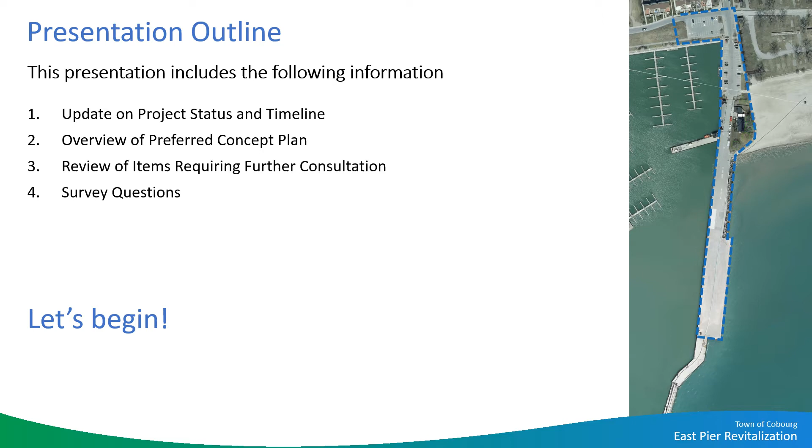The town and design team have been busy since the last project update was provided in September of 2020. Branch Architecture, retained in July 2020, has finalized their cultural heritage report pertaining to the East Pier context and the lighthouse. The findings of this report have been integrated into the developing design for the pier.

As noted, the town, in collaboration with the MBTW Group, conducted a virtual public meeting followed by an online survey and discussion forum, which was open from September 4th to October 5th of 2020. Results from this public engagement can be found at engagecobourg.ca/waterfront-plan-east-pier 1.

While the design work for the East Pier revitalization area was underway, the town retained Shoreplan Engineering to assess the condition of the existing harbor structures. Shoreplan's final report indicated that several of the shoreline structures in the harbor area require repair before any other improvements can be implemented. This is a new situation that has affected the project timelines and will be further explained in the next couple of slides.

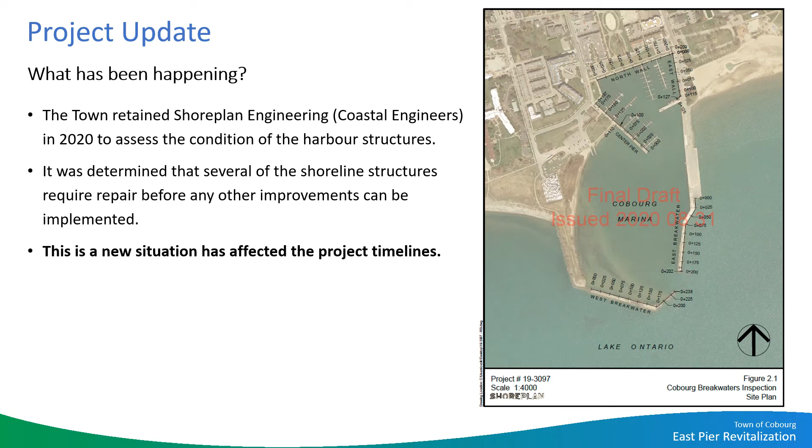The existing harbor structures affected include the east and west breakwaters, east and north basin walls, and the center pier. The town has retained a consultant to prepare detailed design drawings for the shoreline repair work, and this work will begin shortly.

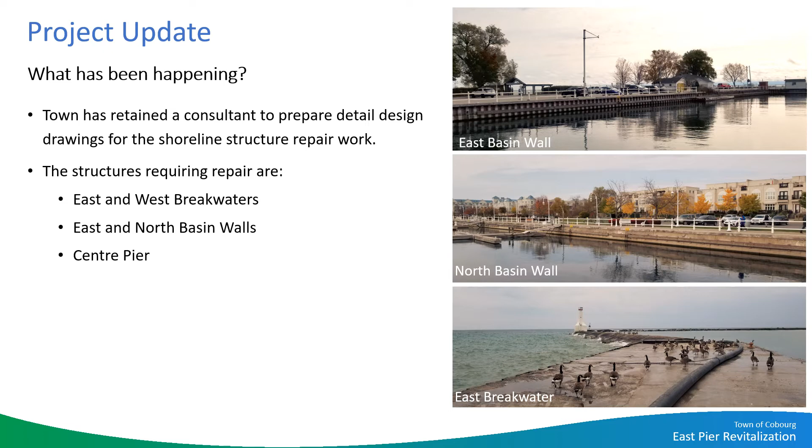In the meantime, the design team is moving forward with a detailed design for the East Pier revitalization area. Please note that the limit of work includes the pier area from the Coast Guard building south to the end of the pier. It does not include any portion of the parking lot to the north or any part of the east breakwater. Landscape improvements to the East Pier revitalization area cannot be done until the recommended shoreline repairs have been completed for the east breakwater and the east basin wall.

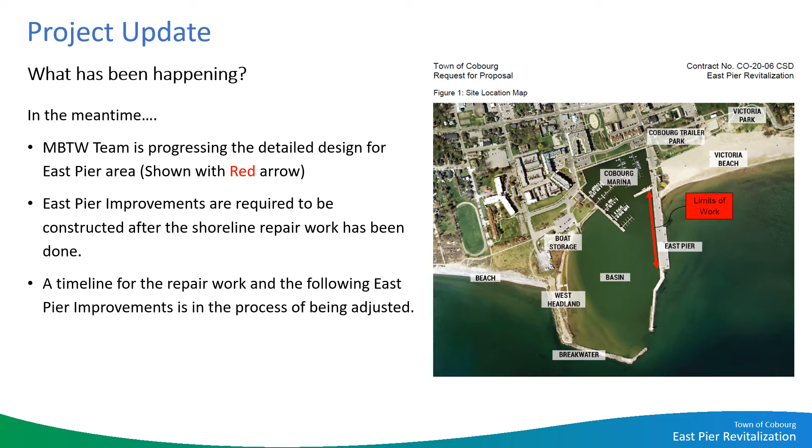The town is working on the timeline for the harbor structure shoreline repair work and the East Pier revitalization improvements. The revised project timeline presented here is preliminary and will be adjusted once the town's shoreline repair consultant begins their work. It is anticipated that the detailed design for both the East Pier revitalization project and the harbor structure repairs will proceed at the same time, with the East Pier detailed design work wrapping up this summer.

It is expected that the on-site harbor structure repairs will begin in early 2022 and conclude sometime in 2023. Once the harbor structure repairs are complete, construction of the East Pier revitalization work can begin, subject to council approval. It is anticipated that the East Pier revitalization works will take between 8 to 10 months to complete.

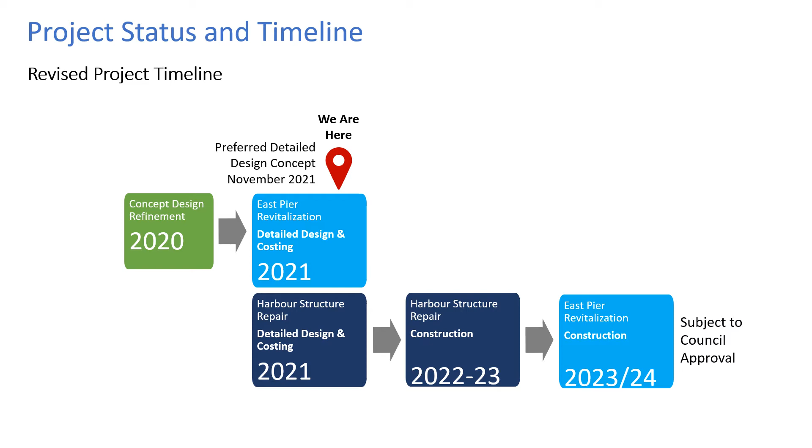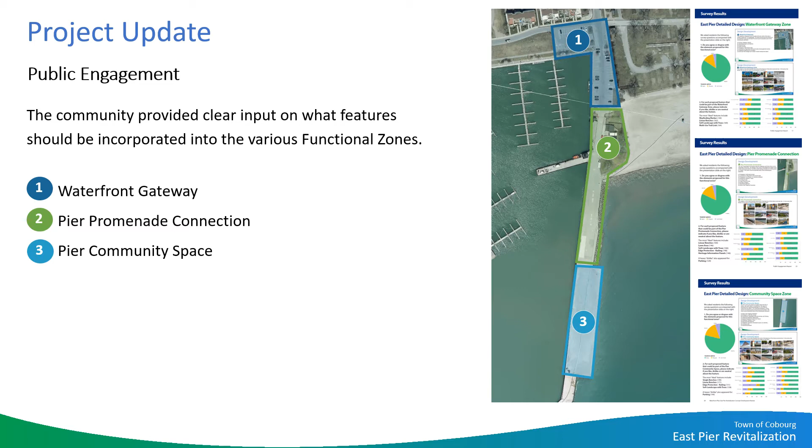The next few slides provide a quick snapshot of what the town and design team learned from the September-October 2020 public engagement. The community provided clear feedback on what features would be preferred for each of the project's functional zones. We also learned that the community preferred both the venue and urban park and expanding the green option design approach for the site. The design team has incorporated key elements from both design approaches into the preferred concept.

This will include incorporating features that will facilitate a variety of special events, while at the same time providing space for soft landscaping and trees. The community also indicated that a hybrid between heritage and contemporary site elements would be preferred, and that cultural heritage interpretation opportunities would be important.

The next few slides include information on the preferred concept plan design. We will quickly point out some of the main features of the design. Please feel free to pause the presentation at any time to review the plan in more detail. Note the thought bubble symbol in the lower left corner of the slide, which means we'll be asking you a question regarding this information.

Item 1 is a 6-meter wide access road that runs along the west edge of the pier. Note that north on this diagram is pointing to the right. The access drive accommodates vehicular circulation to the end of the pier and connects to a full turnaround area. Pedestrians and cyclists may also use the access drive for circulation.

Item 2 identifies 2 locations along the access drive where traffic calming measures are proposed. These bump outs include bollards, seating opportunities, and crosswalk connections to the other side of the pier.

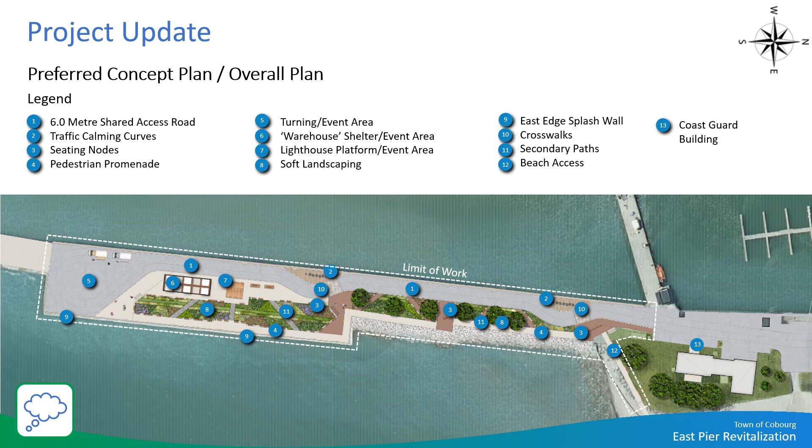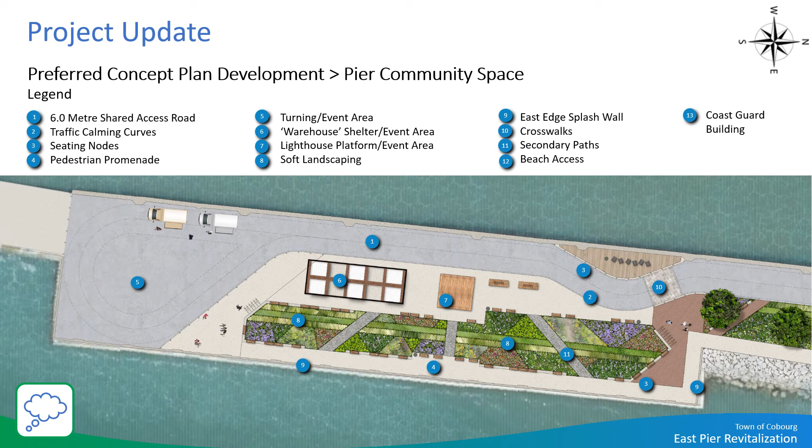This slide shows the south part of the pier as an enlargement so you can see more detail. Again, please feel free to pause the presentation to take a closer look.

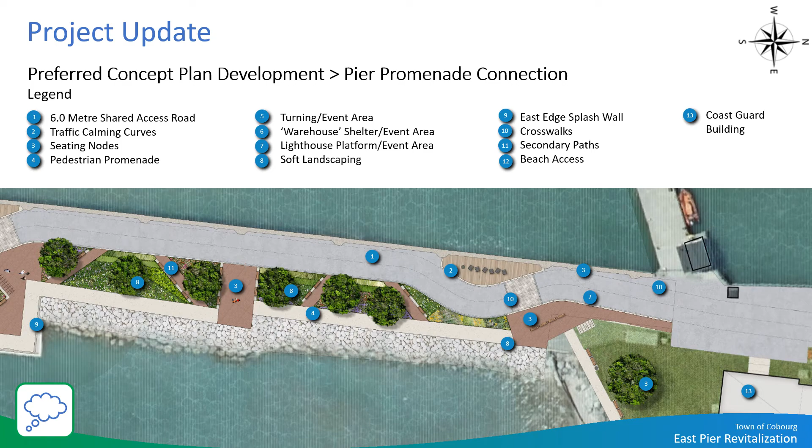The next couple of slides show 3D model renderings of what the site might look like after construction. Please note, landscape features shown in the model shots are placeholders to represent location and scale and may not represent the actual features installed. The first rendering shows a bird's eye view of the south portion of the pier, with the shot generally looking south and east.

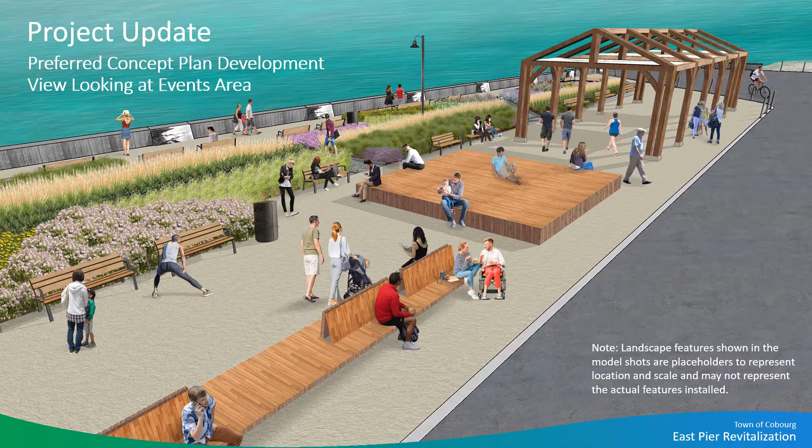This slide shows a bird's eye view looking generally north and east from the wide portion of the pier towards the Coast Guard building. It shows the design for the narrower part of the pier. This next slide shows a closer view of the lighthouse platform and the warehouse structure.

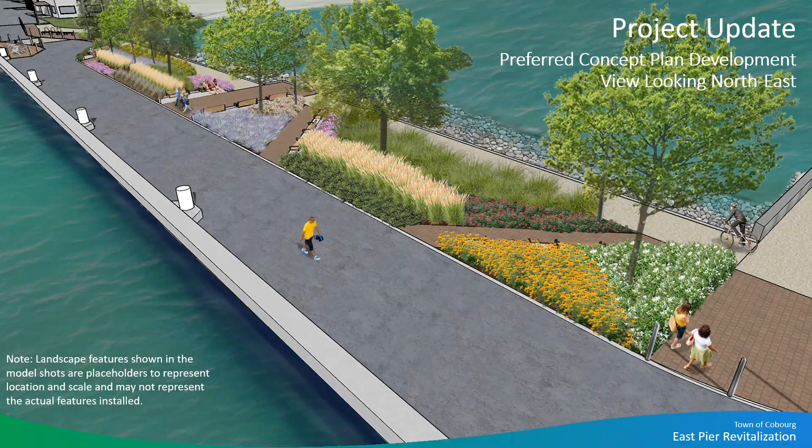There are a few items for which we need your help. Two aspects of the proposed design, as identified through community feedback, need further engagement in order to confirm direction. The two items are parking on the pier and charter and tour boat docking.

With regards to parking on the pier, feedback obtained from the community was split on the provision of parking. To help clarify this item, the team has prepared two possible locations for parking on the pier for your consideration.

In regards to charter and tour boat docking, the approved user needs assessment report from 2018 shows deep water docking for tour boats and charter boat docking on the west side of the pier. We would like to know how you feel about including this kind of use on the pier.

Please note, you can provide your opinion on the provision of parking and the inclusion of charter and tour boat docking in the following survey.

Let's start with parking first. On this slide, the image on the top shows the pier design without parking. This is a design that was presented earlier in this presentation. The access drive is uninterrupted right to the end of the pier and terminates in a full turnaround loop.

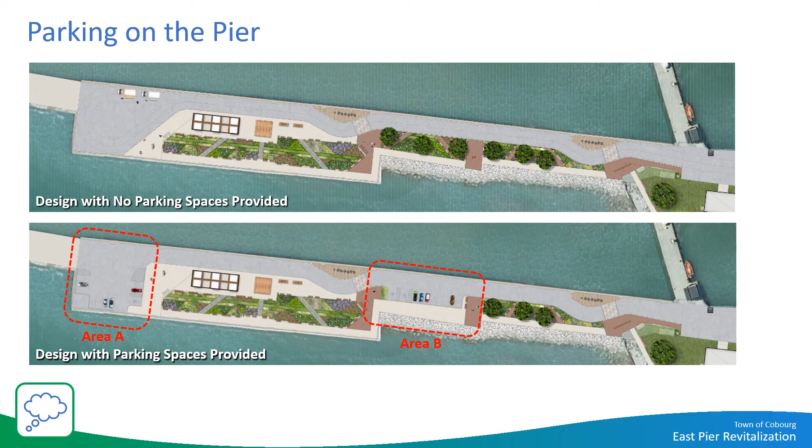This slide shows two images related to parking Area A. The image on the left shows the current design with no parking at the end of the pier. You can see the full turnaround area and the paved area that can be opened for flexible use.

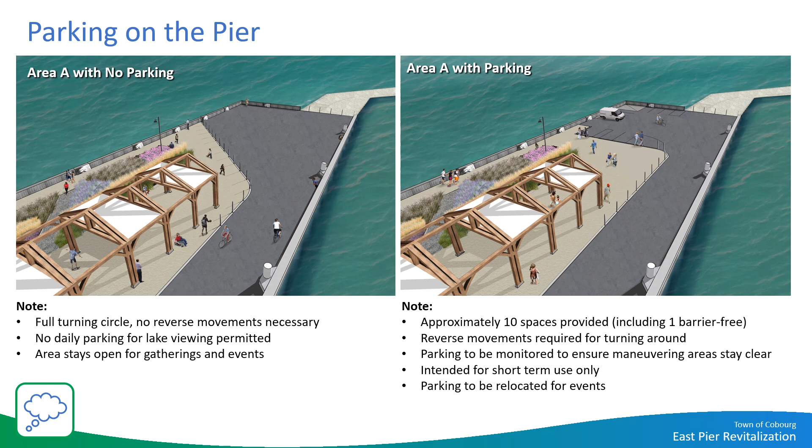The image on the right shows what this area would look like if the parking was provided. Note that a vehicle may need to perform reverse movements to turn around in this area if the parking spots were occupied. Parking in this area may need to be monitored to ensure that the turnaround area remains clear.

This slide shows two images related to parking Area B. The image on the left shows the current design with no parking. This maximizes the amount of soft landscaping that can be provided in this area. The image on the right shows what this same area would look like with parking added. Tell us what you think about parking in the following survey.

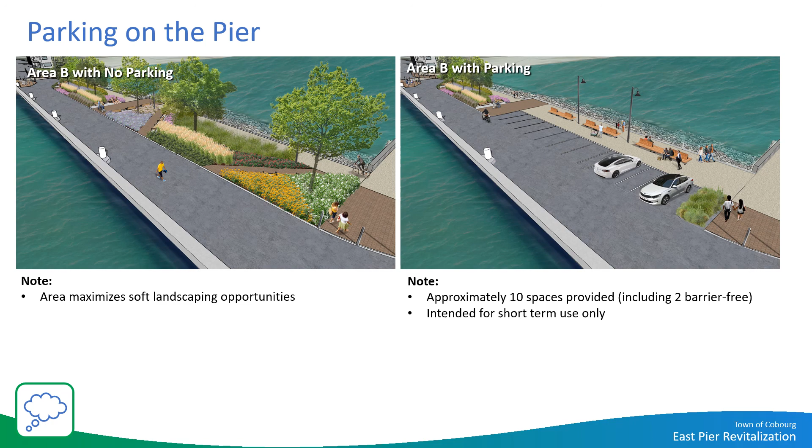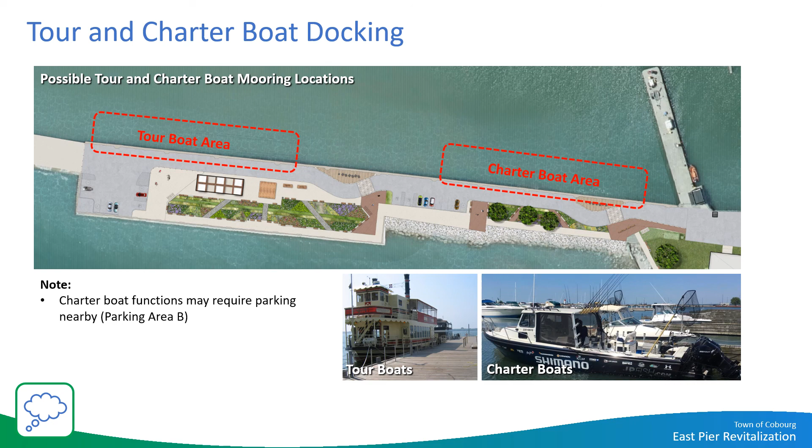Tour boats would have to moor towards the south end of the pier where the water would be the deepest. Tell us what you think about permitting tour and charter boat uses on the pier.